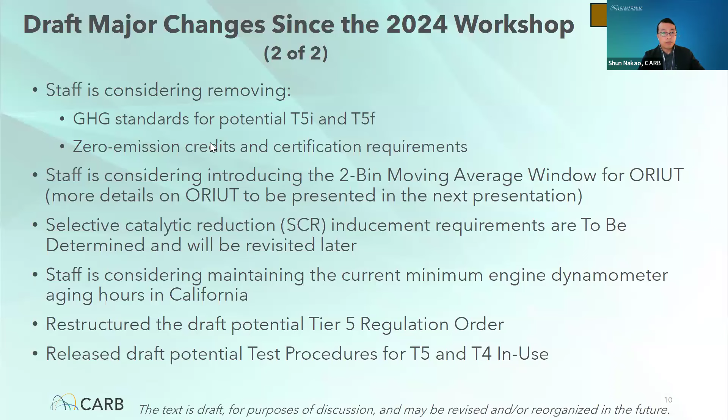Since it is optional, we are considering ways to encourage compliance with Tier 5 interim. One possible approach is to tie incentive funding in the California Clean Construction Program to the Tier 5 interim optional standard. We're also considering using the same approach for Tier 4 final plus DPF to gain short-term PM benefit.

We are requesting feedback on this. Is there any alternative approach for incentivizing optional Tier 5 interim?

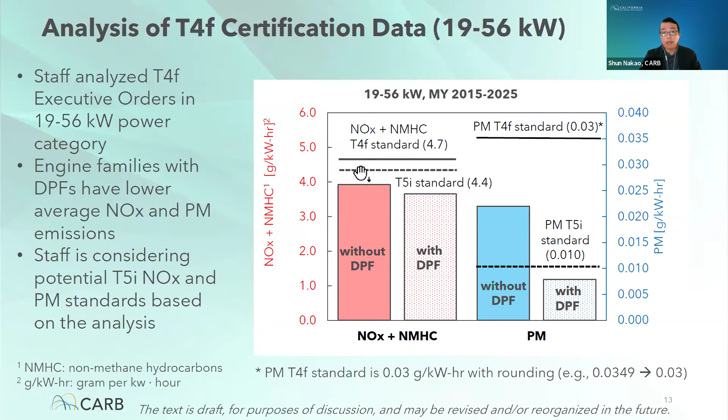As you can see, engine families with DPF have slightly lower NOx plus NMHC emissions, and engine families with DPF have significantly lower PM emissions. Based on this analysis, we are considering the potential Tier 5 interim standards shown in these dashed lines.

This is a similar slide as the previous one, but for the 56 to 560 kilowatt power category. Similarly, engine families with DPF had slightly lower NOx emissions, and engine families with DPF had significantly lower PM emissions. Based on this data, we are considering potential Tier 5 interim standards shown in the dashed lines. We are requesting feedback: is there any concern about the stringency of Tier 5 interim, considering that it is optional?

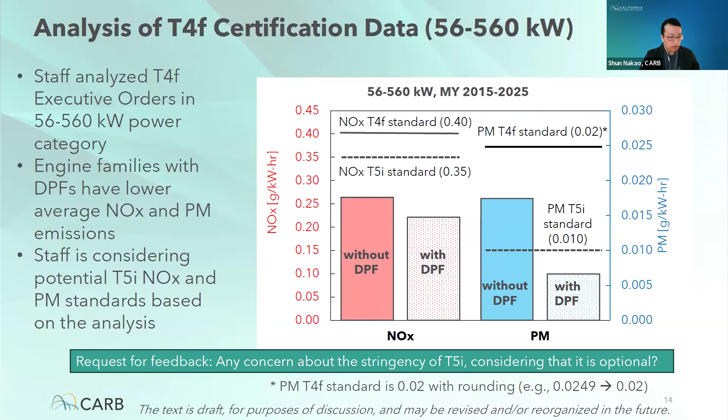The previous slide shows the Tier 5 interim standard, and this chart compares the Tier 4 final standards and potential Tier 5 interim standards and Tier 5 final standards for NOx or NOx plus NMHC, for your reference.

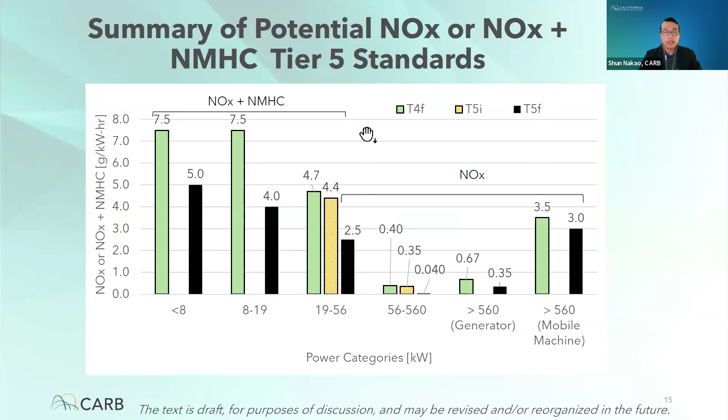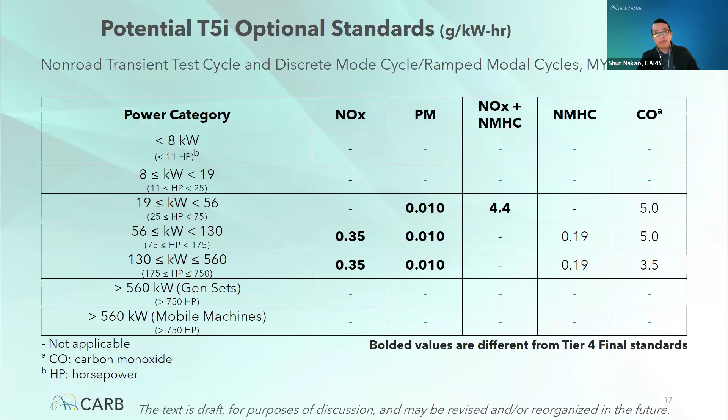This is the same idea, but in a table. This compares the potential Tier 5 interim PM standards for your reference, and also shows the potential Tier 5 final standards for your reference.

These potential standard numbers have not changed since the previous workshop. So the only change for the Tier 5 final standard is the implementation timing.

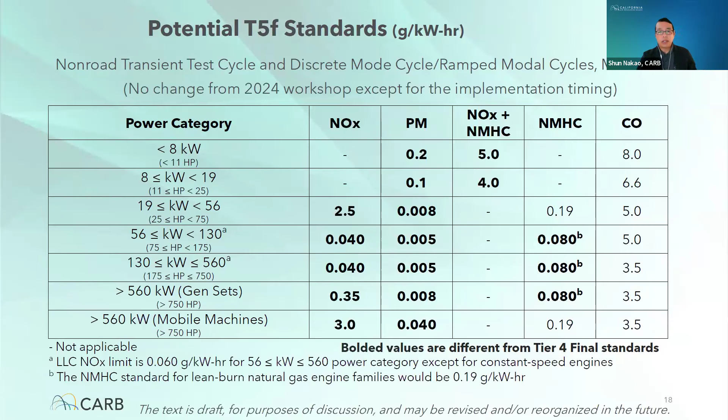These are other potential requirements for optional Tier 5 interim. First of all, Tier 5 interim would not include the new elements in Tier 5 final, such as low load cycle, idle reduction, off-road OBD, off-road in-use testing, and so on.

Tier 5 interim engines would not generate California averaging, banking and trading credits, to avoid earning both federal and California ABT credits. There will be no opportunity to transfer federal ABT credits to California ABT credit banks, because we don't want those credits to be double counted during this interim period.

The use of federal ABT credits would not be allowed for certifying Tier 5 interim engines during the interim period, because Tier 5 interim is optional. Manufacturers certifying Tier 4 final or Tier 5 interim after Model Year 2036 using the 5% limited production allowance must offset the difference between those standards using ABT credits.

Tier 5 interim engines would need to comply with the in-use not-to-exceed (NTE) emission limits and test procedures for the CARB off-road in-use compliance program. Lower thresholds for defect reporting and corrective action apply due to smaller sales volume in California.

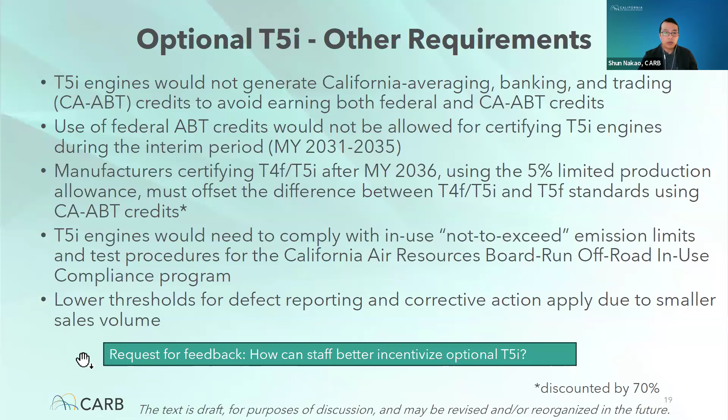From here, I will discuss changes in various major elements. Regarding zero emission credits, we are considering removing zero emission credits. A potential PACE regulation, or phased advanced clean equipment regulation, may pursue zero emission credits with the development of hybrid electric and zero emission technology strategies for manufacturers and/or fleets.

For example, for an 8,000 hour useful life engine, the engine aging is 2,800 hours of engine dynamometer aging, and then extrapolation to full useful life, which is 35% useful life.

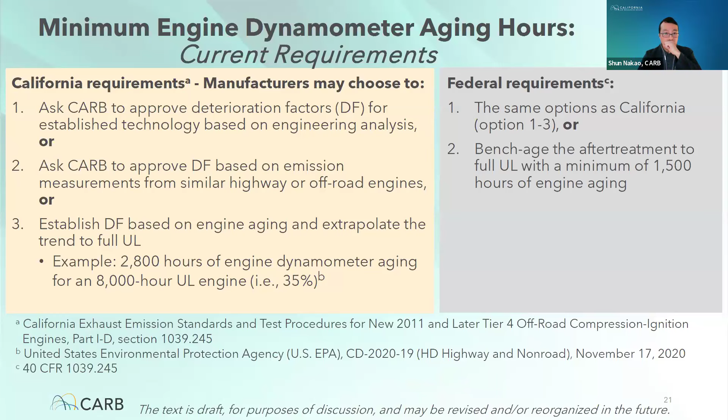In the draft potential Tier 5 final, manufacturers may choose one of two options. The first is the same as the current California requirement, typically 35% of engine aging. The second is similar to the federal requirement, except the minimum hours of engine dynamometer aging are longer: 2,800 hours for an 8,000 hour useful life engine, 1,750 hours for a 5,000 hour useful life engine, and 1,500 hours for a 3,000 hour useful life engine.

The rationale for maintaining the currently employed 35% engine aging is that the potential Tier 5 would not lengthen the useful life hours. We are considering longer useful life year limits, but not changing the useful life hours. Since useful life hours are maintained, we think engine aging hours can be maintained too. We are requesting feedback on whether alignment with the current federal minimum requirement of 1,500 hours is desired. Please share feedback on why shorter engine dynamometer aging might be considered beneficial.

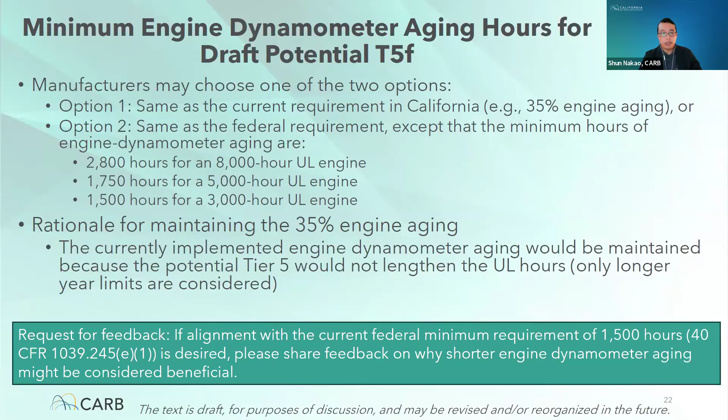Regarding California averaging, banking, and trading, as mentioned earlier, California ABT credit use or generation would not be allowed for Tier 5 interim engines. Engine families meeting Tier 5 final early, in model years 2033 through 2035, may generate California ABT credits with early introduction NOx multipliers.

The California ABT program would begin with model year 2036. There is a one-time transfer of a manufacturer's California portion of existing federal Tier 4 ABT credits through 2035. The transferred federal Tier 4 ABT credits must be discounted by 70% to compensate for the difference between Tier 4 and Tier 5 final requirements, or Tier 5 final elements not in Tier 4, such as low load cycle or off-road OBD.

Regarding the California Transition Program for Equipment Manufacturers, or TPEM, the start of California TPEM would shift to the 2036 calendar year, and there would be no California TPEM for Tier 5 interim, because Tier 5 interim is optional.

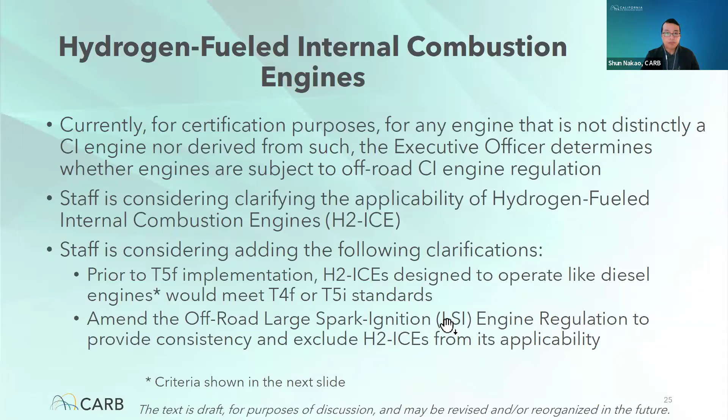This slide is the flowchart for applicable regulation for off-road hydrogen ICE. The first question is, does the engine meet any of the hydrogen ICE criteria shown here? For example, if the engine employs boosted air induction such as a turbocharger, or is designed to operate in equipment previously powered with CI engines, or is derived from CI engines. If it meets any of these criteria, it would certify to Tier 4 final, Tier 5 interim, or Tier 5 final, depending on the model year. If none of the criteria applies, it would meet the off-road LSI engine regulation.

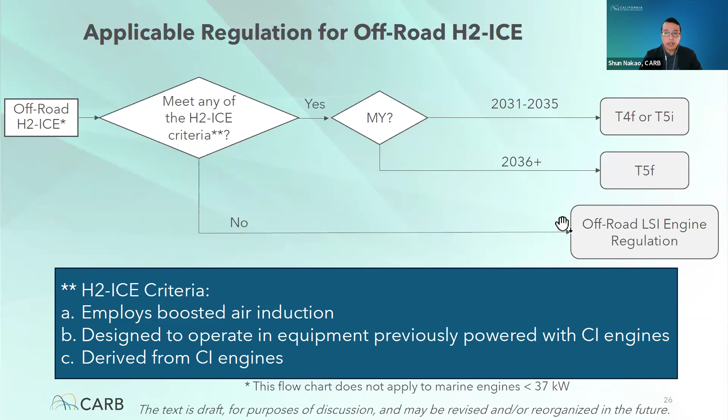This slide illustrates the same idea. As mentioned earlier, we are considering amending the applicability of the off-road LSI engine regulation to exclude hydrogen ICE. Off-road hydrogen ICE meeting any one of the criteria shown in the previous slide would certify to the CI engine standard as applicable, depending on the model year.

So here are potential requirements for hydrogen ICE certifying to Tier 4 final, Tier 5 interim, or Tier 5 final. Hydrogen ICE certifying to Tier 4 final or Tier 5 would meet all the requirements of Tier 4 final or Tier 5 with these following modifications.

The first one is fuel-related sulfur exposure is not required in durability demonstration for hydrogen ICE because hydrogen fuel has extremely low sulfur level.

The second is that we are considering standardizing hydrogen fuel specification for emission testing and service accumulation, aligning with the existing Title 4 CCR section 4181, which requires the high purity hydrogen grade to both internal combustion engines and fuel cell.

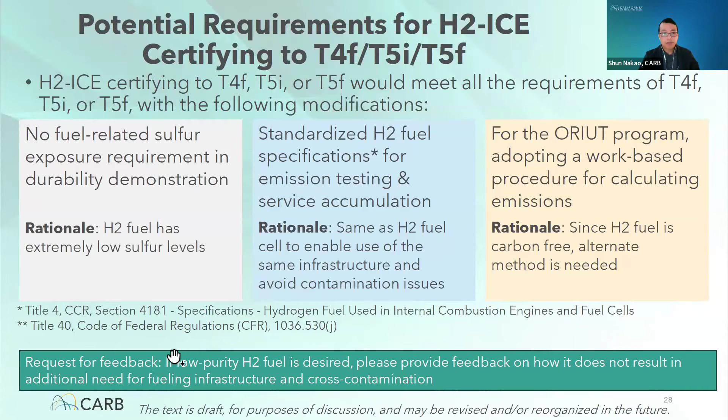Regarding potential requirements for SCR inducement, it is to be determined at this point, and potential strategies include alignment with US EPA's guidance released in August 2025, or alignment with EU Stage 5 SCR inducement schedule, or something else. We are requesting feedback on potential strategies for SCR inducement.

We already discussed useful life warranty defect reporting in the previous workshop, and previously considered lengthened year periods in useful life and warranty for Tier 5 interim as well, but we now consider applying them for Tier 5 final only.

Defect reporting and corrective action thresholds will be based on California production volume for Tier 5 interim and Tier 5 final, to account for low sales volume only in California.

The next element is marine compression ignition engines less than 37 kilowatt. Currently, Tier 2 standards for propulsion marine CI engines below 37 kilowatt remain in effect in California, while marine Tier 3 standards are in effect for federal standards, and we are considering solving this inconsistency.

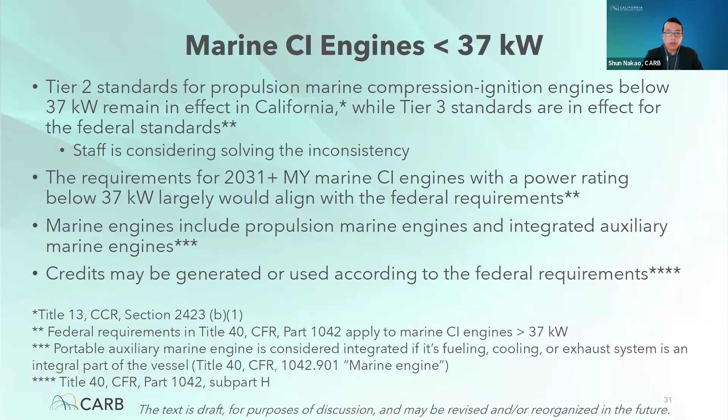Staff is also considering several relief options to provide additional compliance flexibility for non-profit labor union organizations that provide training on the use of off-road in-use diesel equipment. These fleets are currently not exempt, but they can follow the less stringent small fleet requirement regardless of the actual fleet size. Staff is exploring several relief options, including exemption from certain requirements for these entities.

We are requesting feedback on everything, including all sections of the draft regulation order and the draft test procedures. Here we list some of the specific elements we are requesting feedback on.

Regarding Tier 5 interim optional, is there any concern about the stringency of Tier 5 interim, considering that it is optional? We are considering tying Tier 5 interim to incentive funding to incentivize optional standards. What concerns are there? How best can manufacturers be incentivized to bring Tier 5 interim engines to the market?

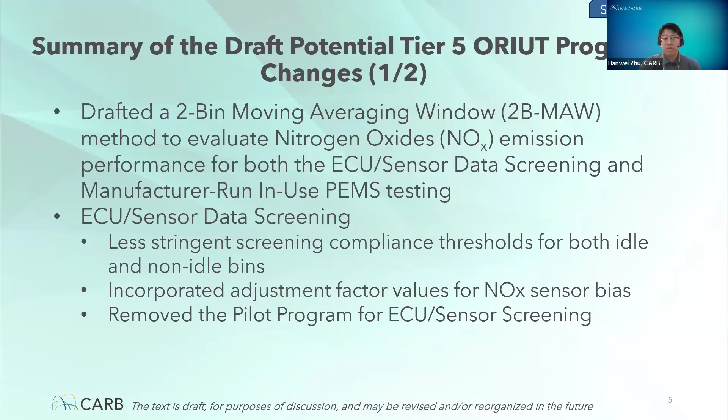For PEMS testing, we're considering reducing the testing burden by limiting PEMS test orders to 25% of the number of large sales volume engine families. We're also considering introducing low ambient temperature correction factors to account for equipment operated in cold environments, and removing the interim margin from the in-use PEMS NOx emission threshold. We're considering relaxing the requirement for small and very small sales volume engine families.

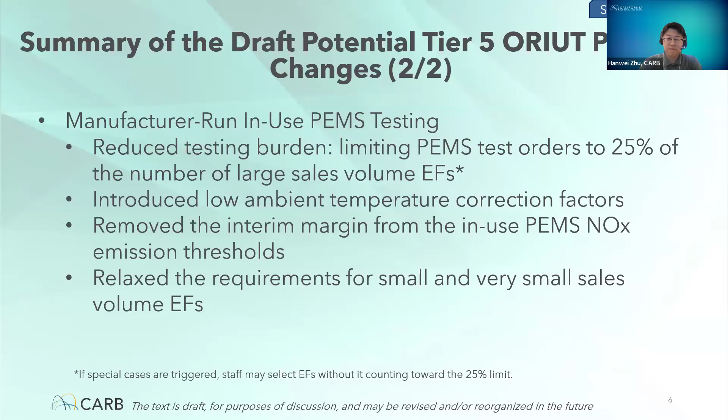The EO will assess the data and check if the NOx and PM criteria are both met for each engine family. If both NOx and PM criteria pass, the engine family will be flagged as a clean engine family and exempted from PEMS testing. Otherwise, it will be flagged as a dirty engine family.

I want to note that a dirty engine family doesn't mean it is high emitting or even emission non-compliant. It just means the engine family will be flagged for potential manufacturer-run in-use PEMS testing, and a compliance determination will be made after the PEMS testing. Also, we haven't made any changes to the PM criteria for ECU sensor data screening, so this presentation will mostly focus on NOx.

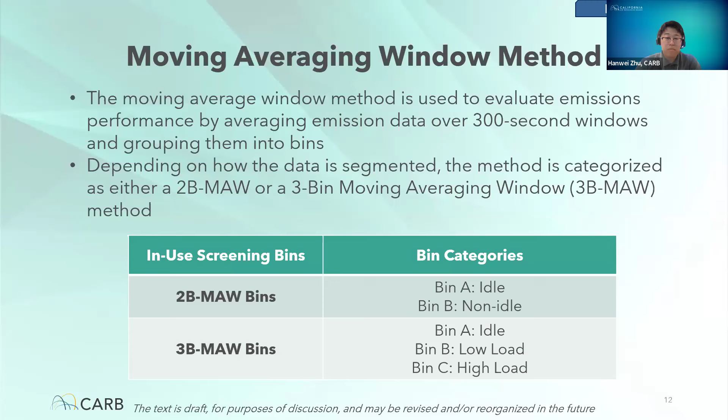In 2023, we introduced a torque-based 3-bin moving average window method to assess in-use NOx emissions using onboard sensors. Stakeholders have provided valuable feedback, including, first of all, the minimum window requirement. Stakeholders are concerned that meeting the minimum window requirement for bin B and bin C will be challenging for some off-road applications, since some of those applications may mostly be operated in either bin B or bin C. Another suggestion by stakeholders is that the 2-bin method could be equally as effective in identifying high-emitting engines compared to the 3-bin method.

Given the feedback we received from stakeholders, we have reevaluated the 2-bin method based on the latest findings from the off-cycle testing contract with Southwest Research. The project demonstrated that the 2-bin method is equally effective at flagging higher emitting engines. It also demonstrated that the 2-bin method increased the likelihood of meeting the minimum window requirement within a single day of testing. So we're considering selecting the 2-bin moving average window method as the NOx emission evaluation method to align with the US EPA.

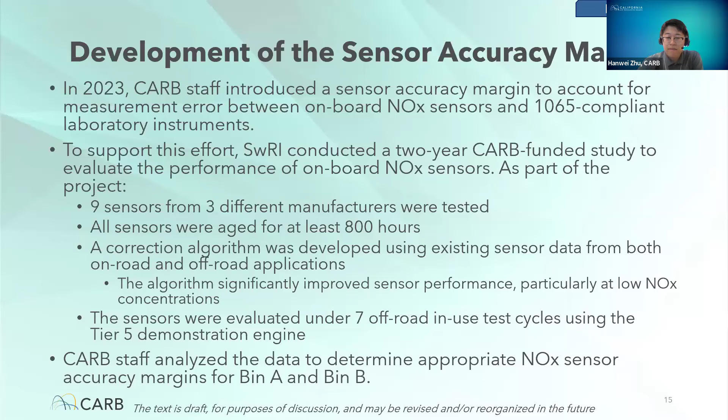So we're considering a sensor accuracy margin for bin A of 0.2 grams per hour, which covers over 85% of this distribution. We're really interested in any feedback from stakeholders on this margin. If there's any suggestion, don't hesitate to share your thoughts and rationale with us, along with some supporting data.

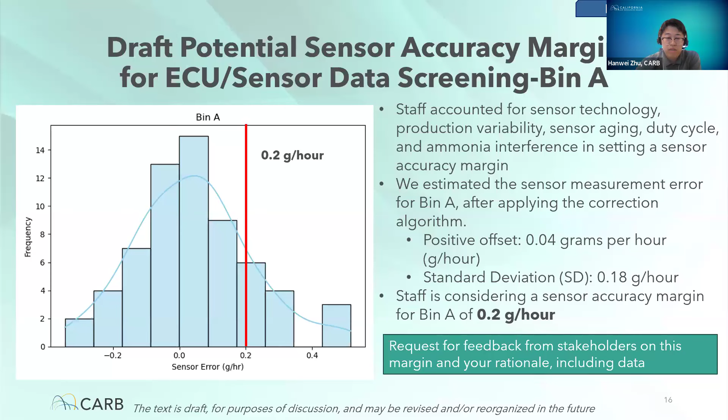We have also estimated the sensor measurement error for bin B, after applying this correction algorithm. The positive offset is around 0.02 gram per kilowatt hour, and the standard deviation is around 0.016 gram per kilowatt hour. We're considering a sensor accuracy margin for bin B of 0.036 gram per kilowatt hour. Again, we're very interested in feedback from stakeholders on this margin. If there's any suggestion, please share with us, including the data.

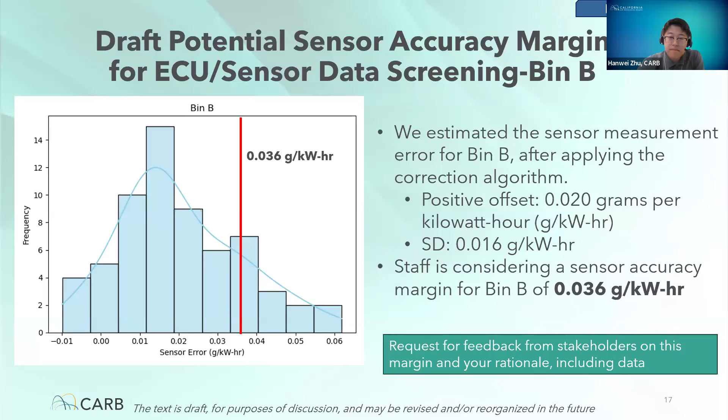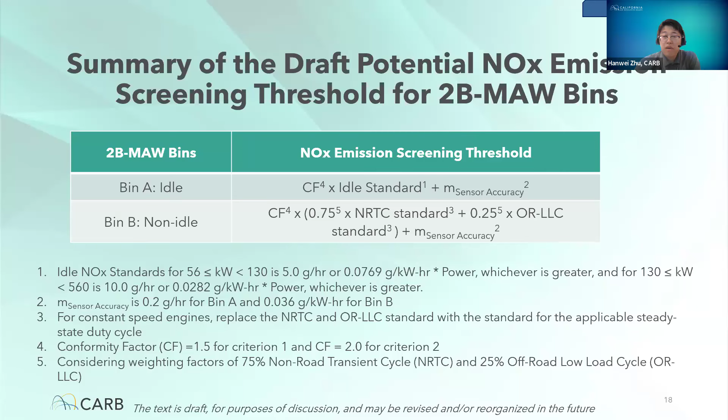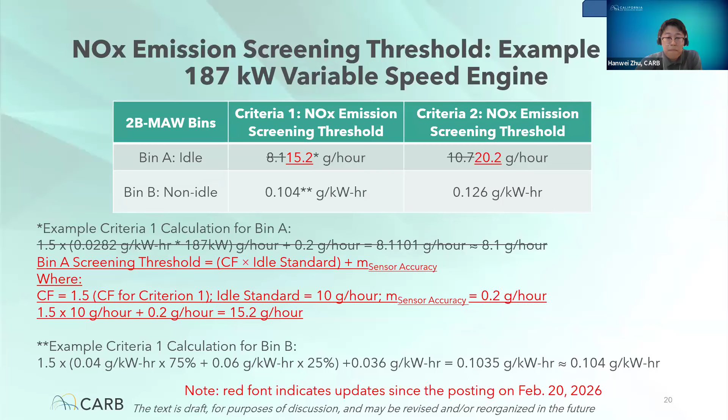Reporting rate means the percentage of engines in the engine family that submitted data, and the pass threshold is greater than 75% of the total CA sales volume. For criteria 1, this means the average NOx emissions for bin B compared to the screening threshold, and the pass threshold in this example is less than 0.104 gram per kilowatt hour. I want to explain criterion 2 very carefully here: it is the combined percentage of unreported and high-emitting engines, and the pass threshold is no greater than 25% of the total CA sales volume.

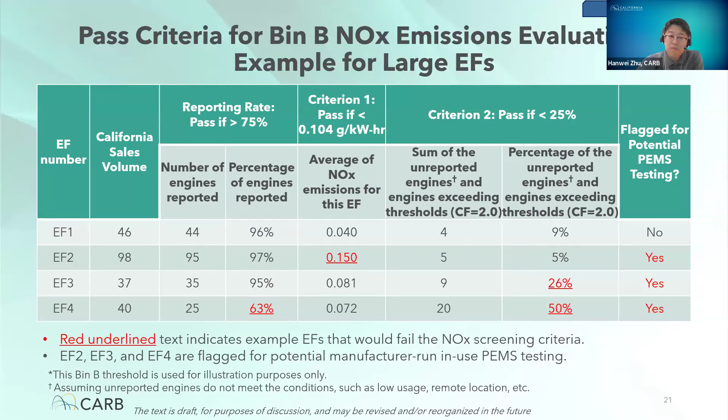The last change I want to mention to sensor screening is the pilot program. We have reevaluated the need for a pilot program because the implementation start date for Tier 5 final will be model year 2036, providing manufacturers with additional time for research and development. Also, there will be no onboard diagnostic requirement for Tier 5 interim engines. As a result, we're considering removing the ECU sensor data screening pilot program.

We'll then talk about the second part of the ORIUT program, which is the in-use PEMS testing.

First, we want to talk about the feedback and potential changes. Stakeholders expressed concern that requiring PEMS testing for 25% of the engine family was too burdensome, and that some off-road programs should not be compared to on-road or on-highway programs.

In response, staff is reducing the burden by limiting PEMS testing to only large volume engine families that have a greater emission impact. The current draft potential test procedure states that the annual test order will not exceed 25% of the annual number of large volume engine families certified over the past 4 years.

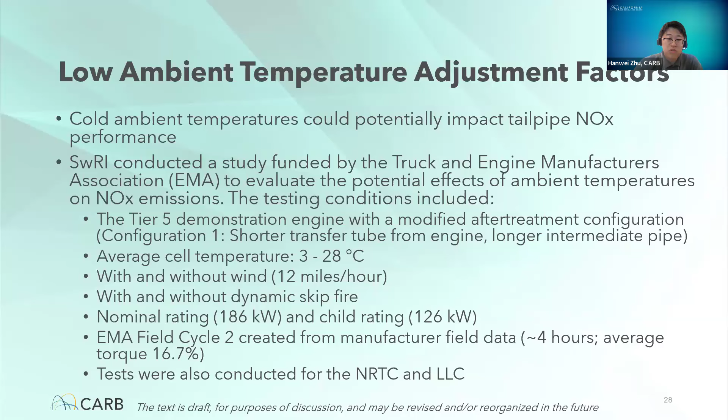The results show that low ambient temperature can increase NOx emissions under certain configurations and cycles. The worst case temperature effect on the EMA field cycle 2 was observed for the child rating engines, and NOx emissions in bin A increased from 0.12 gram per hour at 27 degrees C to 2.2 gram per hour at 3 degrees C. Similarly, bin B emissions rose from 0.03 gram per kilowatt hour to 0.079 gram per kilowatt hour.

The off-road low-load cycle was also tested in this study, but we think that although the low-load cycle had higher emissions than field cycle 2, the field cycle result would be more relevant and representative, because low ambient temperatures are only encountered during field cycle testing.

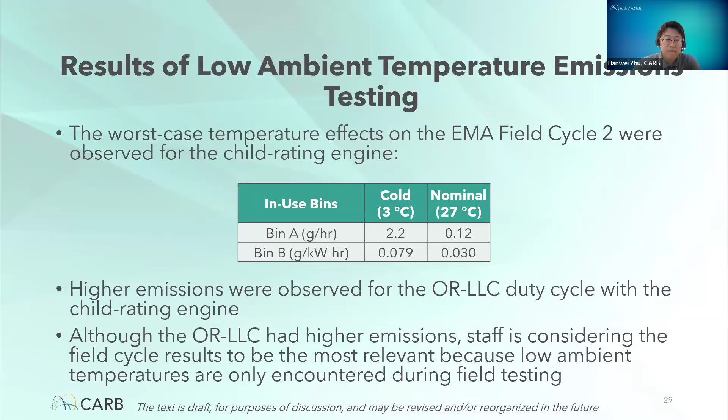Based on those testing results, we developed a correction factor for PEMS NOx threshold when the temperature falls below 20 degrees C. For bin A, the equation to calculate the correction factor is 20 minus the ambient temperature in degrees C, times 0.122 gram per hour. For bin B, the slope becomes 0.00288 gram per kilowatt hour. Those slopes were developed based on linear fitting of the data from 3 degrees C and 27 degrees C, and we believe these correction factors will help account for the possible increase in emissions under cold conditions.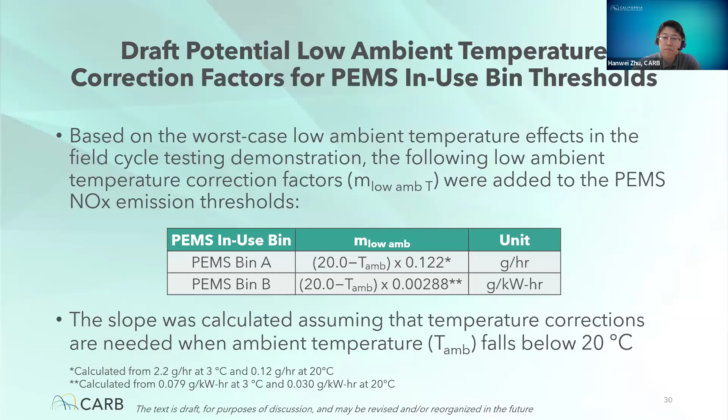Moving on to other feedback for in-use PEMS testing, another question raised by a stakeholder is whether failing a PEMS testing will automatically trigger recall. The answer is yes. If an engine family fails the sum over sum emission threshold, the manufacturer will take corrective action under CCR section 2113 and 2125. The corrective action may include recalibrating the engines, replacing defective parts, or taking other measures to reduce the emissions.

Another change staff is considering is removing the interim allowance for PEMS testing. The interim allowance was originally set to account for emission measurement technology advancement during the interim period. Because Tier 5 interim for model year 2031 to model year 2035 is optional, and our draft timeline for Tier 5 final implementation starts with model year 2036, we believe this will provide manufacturers sufficient time to continue technology development and prepare for emission compliance. Therefore, we're considering removing that interim allowance.

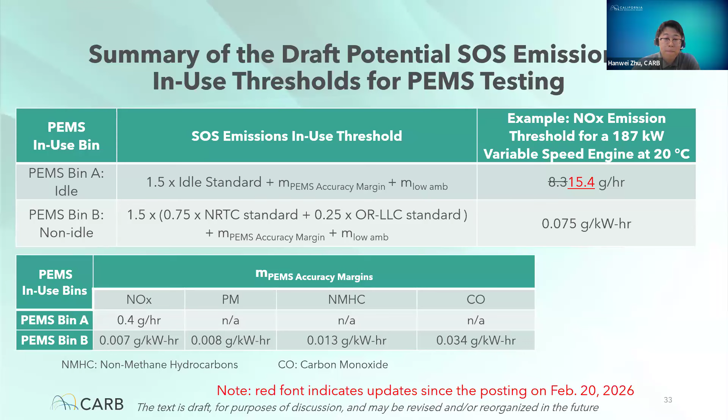Lastly, we invite stakeholders to provide feedback on all aspects of the draft proposal. Specifically for ECU sensor data screening, we're seeking feedback on NOx sensor accuracy margin, reporting flexibility, and removal of the pilot program. For PEMS testing, we're seeking feedback on removing the interim allowance, the 25% cap on large volume engine families, the criteria for selecting test articles, and the development of the low ambient adjustment factor.

Our email address for comments is tier5@arb.ca.gov. We think stakeholders' input is critical to finalize these test procedures and ensure all of those are effective. Thank you so much for your attention, and I'll take questions.

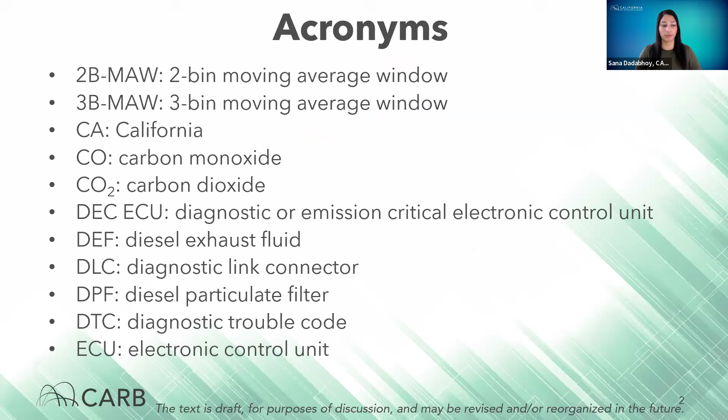Today we will be talking about updates to the OR-OBD proposal. The draft OR-OBD regulation provided on the Tier 5 workshop website includes the details of the proposal. This draft regulation contains some revisions from the proposals we presented at the workshops in October 2023 and October 2024, and in this presentation we will be covering the major revisions.

In the original proposal, the applicability included electronically controlled off-road diesel engines certified to Tier 5 standards. In the revised proposal, the applicability would include off-road engines that are certified to the Tier 5 final standard, are equipped with an ECU that controls fueling, and are equipped with an ECU that controls intake airflow, EGR flow, turbocharger boost level, DEF injection quantity, regeneration events, after-treatment thermal management strategies, or catalyst operating conditions.

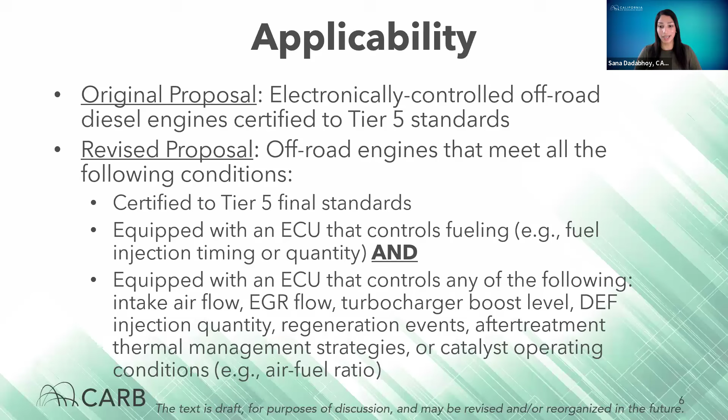This slide is just a quick refresher of OBMD versus OBD. Tier 5 final engines that are equipped with SCR systems or a tailpipe NOx sensor will be required to meet the OBMD requirements, while all other engines will be required to meet OBD requirements.

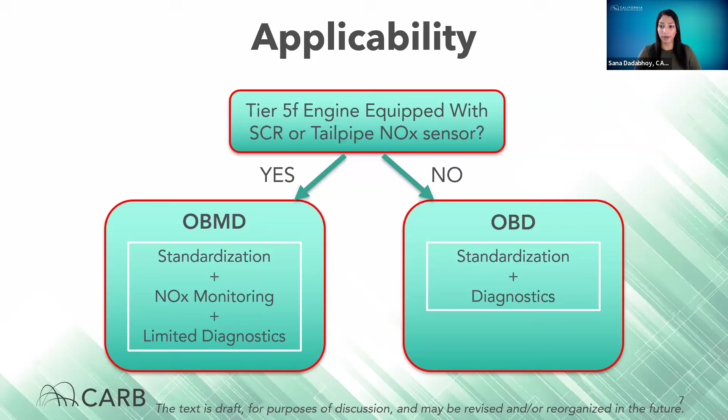The revised proposal eliminates the Phase 1 and Phase 2 terminology while retaining the two stages of implementation. We included this table as a reminder of the requirements of each stage. Stage 1 includes limited standardization requirements, no diagnostic requirements, demonstration testing only for NOx mass accuracy, and no post-certification requirements. Stage 2 includes all of the Stage 1 requirements plus additional standardization requirements, OBD and OBMD diagnostic requirements, diagnostic demonstration testing, and post-certification verification requirements.

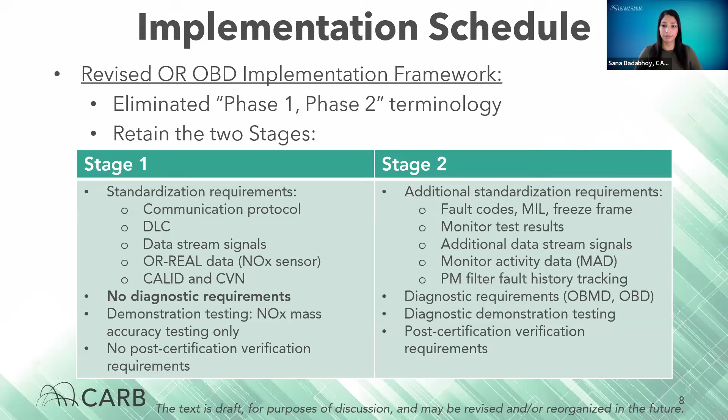Staff is also proposing to revise the schedule to align with the final Tier 5 implementation schedule by removing the parent-child rating distinctions and moving all power categories to the same schedule.

Moving on to standardization requirements. The October 2023 proposal allowed the use of both SAE J1939 and J1979-2 communication protocols, but J1979-2 was removed from the October 2024 proposal. However, due to industry demand, the current proposal is once again allowing the use of both protocols.

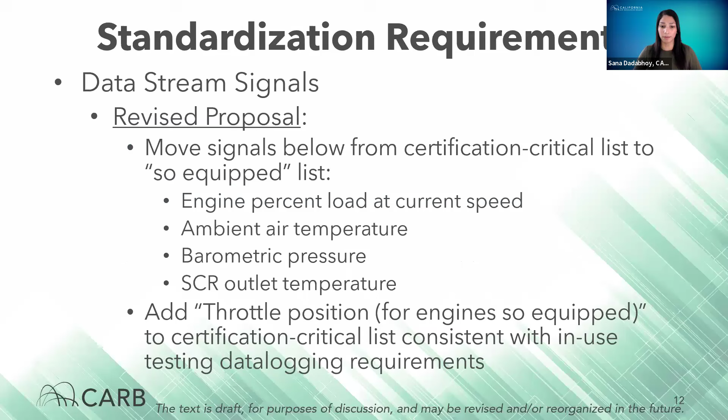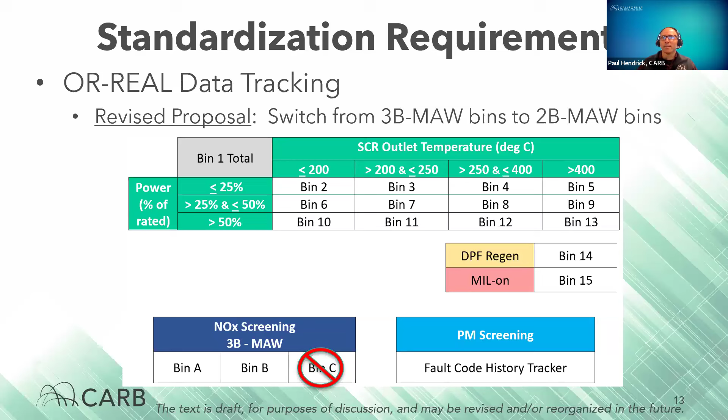But to be consistent with the updates that Hanwei went over in that proposal, we are eliminating bin C. You can see at the bottom, the NOx screening 3B-MAW box. So we're getting rid of bin C to be consistent. On the next slide, that's shown in more detail, exactly what that means.

This table shows the different arrays and the different parameters involved in off-road real tracking. Anywhere you see a bin C, it's being crossed out, so we're keeping bins A and B where they are. If you look at the right-hand column, the lifetime engine activity array, you'll notice we've removed all of the moving average window bins A through C. That simplifies the implementation in the ECU.

It reduces memory usage, and we think it was a good compromise. In the last row, you'll notice that bins A and B were added to the total fuel consumption parameter, and that's consistent with a previous suggestion from industry. Next slide please.

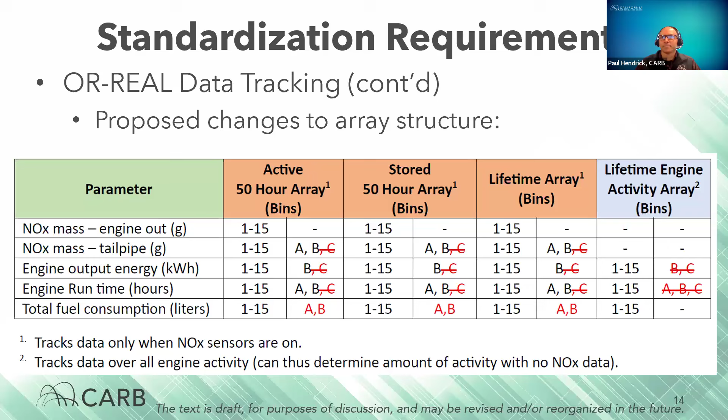Another piece to the proposal relates to how these 300-second windows of data get sorted into the different moving average window bins. Our original proposal used the average power approach, where power was calculated using the torque and speed signals from the engine ECU, and then depending on what you get for a given window, you dump the data into the appropriate bin.

What we're suggesting to change here is to move towards using a parameter called normalized CO2 emission mass instead of average power. That change is going to harmonize with the official method that US EPA uses, so that's a good thing.

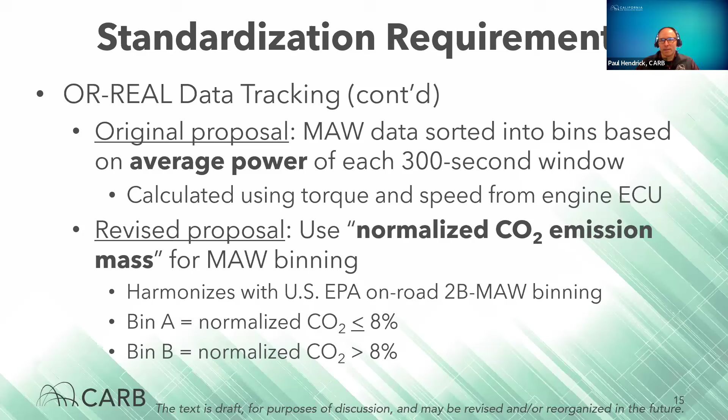So what that looks like for bins A and B is that bin A will be defined for windows that have a normalized CO2 value less than or equal to 8%, and bin B will be for normalized CO2 greater than 8%, so basically everything else. Next slide please.

This equation shows what this term really is. The normalized CO2 emission mass is basically just the total CO2 mass over that 300-second window divided by those three terms that you see in the denominator, and that's the standard equation used in CFR.

The only little wrinkle here relates to this ECO2 term. What we're using for that is the CO2 emission rate from certification test data, specifically from the emission data engine over the NRTC. That's how it's being defined for this usage.

If the engine is a constant speed engine, then it would be the same value from the steady state cycle. Pmax is just the highest rated power for that engine family, and T window is just our familiar 300-second interval. Next slide please.

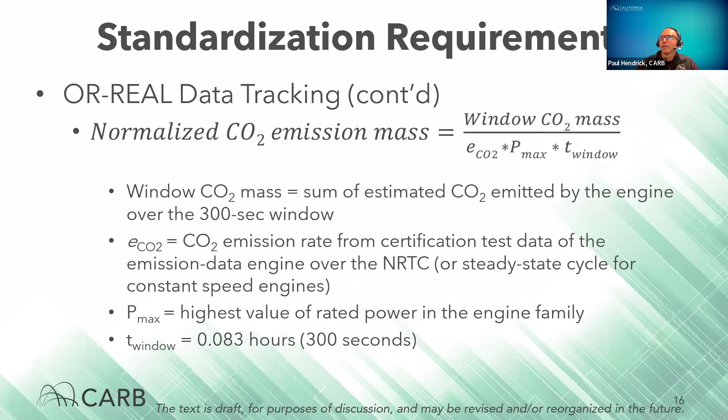For that proposed method to work, of course we need to estimate what the CO2 mass is over that 300-second period. We are not expecting these engines to come with CO2 sensors, so we need to have another way to estimate that value.

What we're proposing here is that we leverage the O2 signal that is coming from the NOx sensors and use that. If you look in that second equation, that's where that percent O2 fits in. The basic idea is that we're approximating all of the oxygen that's being consumed by the engine to be partitioned into CO2 and H2O, which is largely correct. Using that, basically just simple stoichiometry, you can estimate the percent CO2 as shown there.

The 1.8 value, the conspicuous little 1.8 value in the denominator, comes from CFR. For number 2 diesel fuel, sort of standard number 2 diesel fuel, they use a ratio of 1 carbon atom for every 1.8 hydrogen atoms. So that's the background on that one.

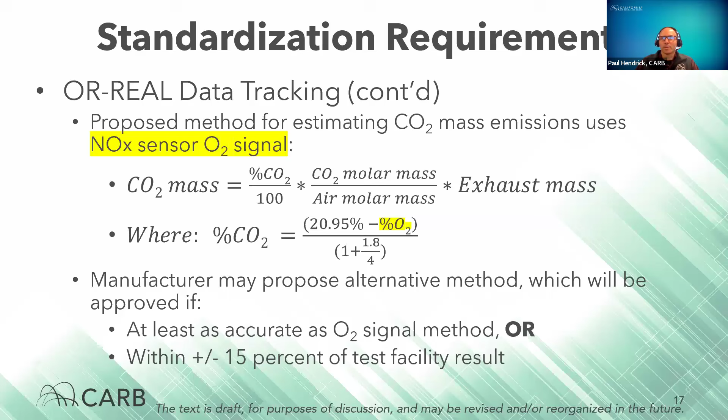Related to these OR real requirements is the NOx mass accuracy requirement. In our original proposal, this was a to-be-determined parameter. We would require that the OBD system engine-out and tailpipe NOx mass estimates satisfy a particular level of accuracy relative to lab results, specifically over the certification test cycle. This is really a certification requirement, not an in-use requirement. So just at the time of certification, we need to check that the ECUs are doing a good job of calculating the NOx mass.

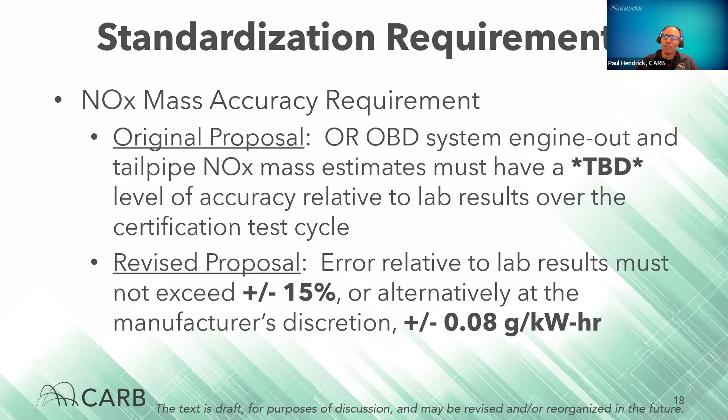What we're proposing now is to fill in the blanks, to say that the error relative to lab results must not exceed plus or minus 15%, or plus or minus 0.08 grams per kilowatt hour. This 'or' means whichever is easier. In practical terms, the most important one is the plus or minus 0.08 grams per kilowatt hour, which would apply to the tailpipe accuracy test. We expect that the 15% would be more relevant to the engine-out NOx mass side of things.

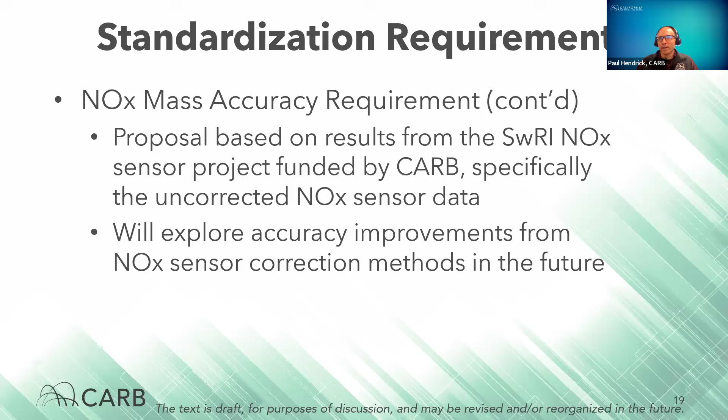This proposal is based on test results that Hanwei introduced in his presentation from the Southwest NOx Sensor project that we funded. What I'm going to show you is the uncorrected NOx sensor data. As Hanwei mentioned, we are encouraged by the results of some relatively simple correction methodologies that Southwest has developed, but we'll look into that more in the future.

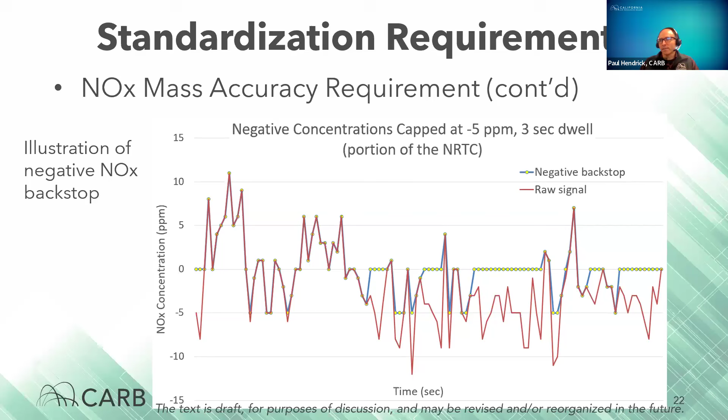Next slide, please. Okay, so this graph is showing the impact of this approach on the NOx error. It's comparing 3 different scenarios, and we're only looking at one hot NRTC for this example. We have the scenario where you have no negatives allowed, which is the original proposal. Then in red in the middle, you have where all negatives are allowed as is. And finally, the negative backstop in green.

So for those sensors that developed a positive offset, there's no difference - all of these strategies give you the same number. But if you look on the right, we have the sensors that had more substantial negative values, and the negative backstop approach does improve, or reduces the NOx error quite noticeably, about 50% or so. So that's good, that's a good thing to see.

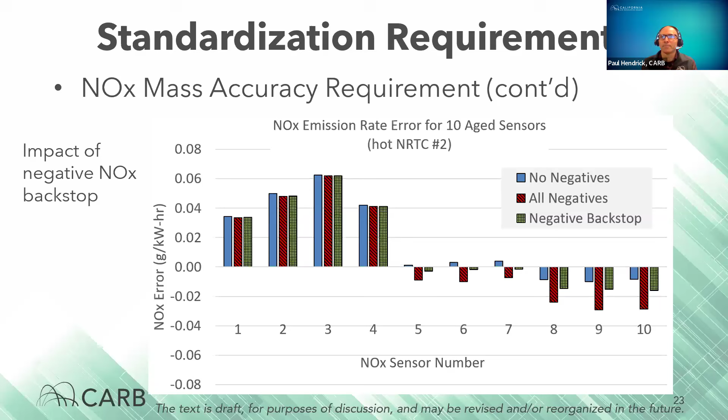Next slide, please. Okay, so now we're shifting gears to another topic that has to do with monitor activity data. This is largely unchanged from the original proposal. This is just the tracking of how often each diagnostic runs. So you have a mini numerator counter that increments every time a monitor makes a decision, and you have a mini denominator that increments every time the general denominator increments, which is kind of a measure of the number of trips or operating cycles that have elapsed.

The only thing we want to do is provide some more detail on when to pause this tracking. What we'd like to see is that if you have a particular type of fault code pop up that pauses the general denominator, then we'd want all tracking in all of the ECUs doing this tracking to pause. That's because all of the mini denominators are looking to this general denominator to determine when they need to increment. So if the general denominator is paused, then all of the mini denominators will also be paused. It would be unfortunate if the mini numerators continued to increment in some DEC ECUs and not others. This makes sense to just pause everything across the board.

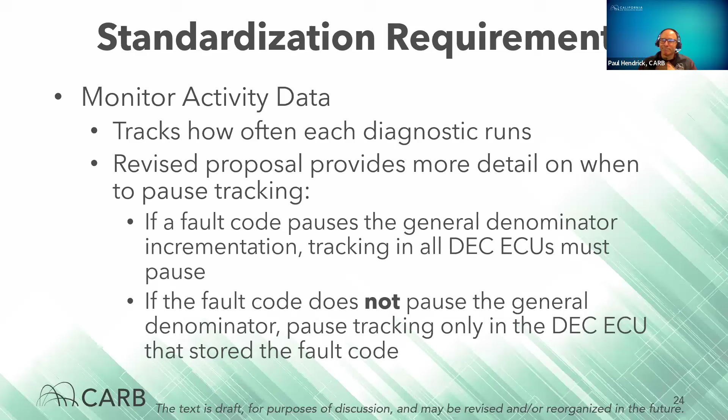But in the more general case where a fault code does not pause the general denominator, then we have our default situation where you would only pause the tracking in that ECU that stored the fault code. Okay, it's kind of in the weeds, but we're just going over it. Okay, next slide, please.

And then another piece of this relates to which ECUs would be required to support a mini denominator. In the original proposal, we said that if the ECU is capable of storing a fault code, then it should also track and report a mini denominator. In the revised proposal, we're adding a criterion to that. So in addition to storing a fault code, the DEC ECU would also need to track and report mini numerator data. It wouldn't make sense to have a DEC ECU that tracks the mini denominator but not a mini numerator, because ultimately you're taking a ratio of these values to determine the frequency that the monitor is running at.

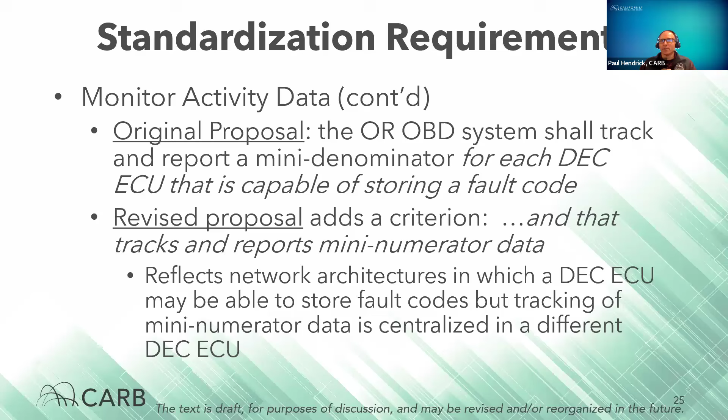And really what this is reflecting are those network architectures where you could have DEC ECUs that are capable of storing fault codes, but not necessarily tracking mini numerator data, because the manufacturer centralized that task in a different ECU. So it's just kind of a clarification here too. Next slide, please.

Okay, so now we're really shifting gears, moving into diagnostic requirements, leaving standardization stuff behind. We're going to start talking about the OBM NOx emission threshold monitor. That's really the flagship monitor of the whole program.

Originally, what we proposed is that the NOx monitor would make pass-fail decisions based on data stored in the OR-real moving average window bins. Originally it was bin B and bin C that this monitor would look into and collect 2,400 windows of data from those bins and use that data to judge if there are high NOx emissions or not.

The problem with this approach is that there would be no monitoring taking place when the moving average window bins are paused due to the presence of a malfunction. Those bins would pause for any fault code.

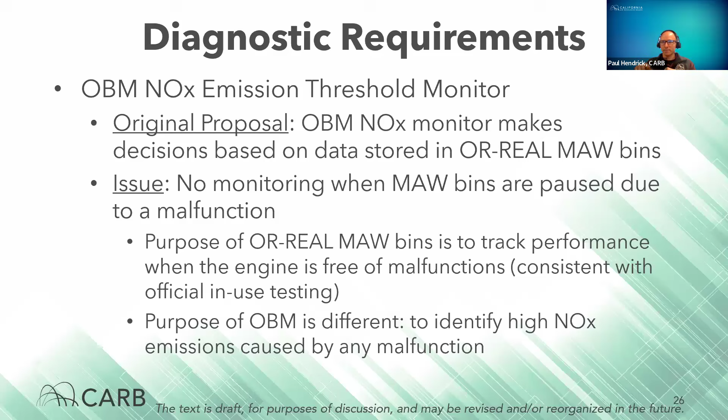So I have a table. If we go to the next slide. Oh, or maybe it's the slide after that. But I'll get to the table in a second.

So the basic proposal, because of that problem, is to have the NOx monitor use data that are independent of these OR-real bins. In essence, what that's going to mean is you will have different pause conditions. The real bins will pause under one set of circumstances, and then the NOx monitor will have its own independent conditions. The next slide will give an example of that.

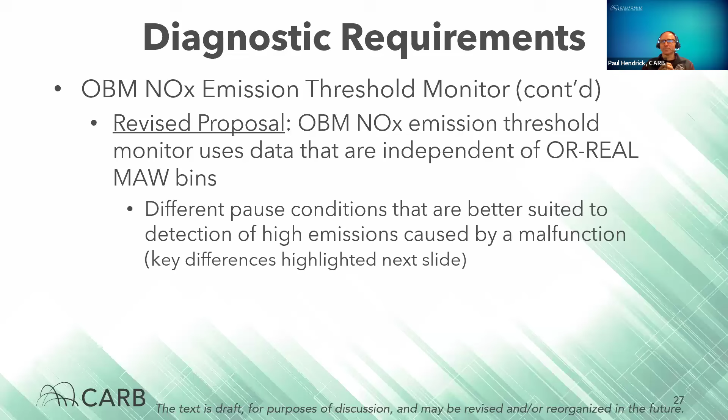So in this table, we have a comparison of how the real bins will behave relative to the NOx monitor under a few conditions here.

As I mentioned before, if you have a fault present and the MIL is on, just the general MIL, then you would have paused real bins, but we would want the NOx monitor to remain active, and that's for the vast majority of fault codes, which include if the engine out NOx sensor has a fault code or the SCR outlet temperature has a fault code. It doesn't matter - we would want the NOx monitor to continue to be checking for high emissions.

But now more specifically, if the MIL is on for a tailpipe NOx sensor malfunction, then everything's paused. And of course, that's because the NOx monitor is totally dependent on that tailpipe NOx sensor to make its decisions.

So there is that alignment, but one notable difference is that in the case of the NOx monitor, we would reset all of the windows that were collected since the last monitoring decision, which can be a lot, right? We're talking about as much as 2,400 windows of data, as opposed to just resetting the current 300-second window, as would be the case for the REAL bins.

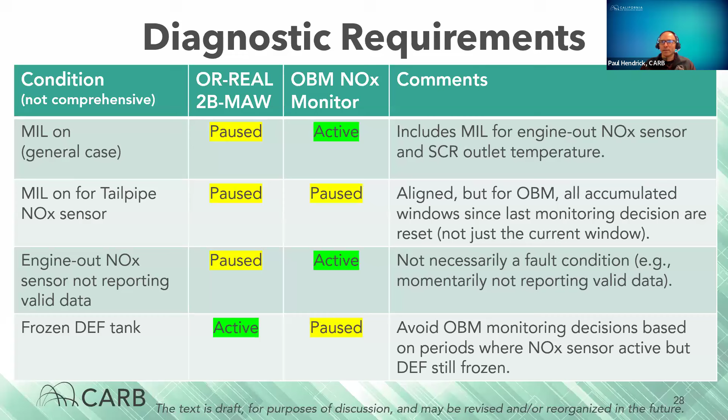But on the surface, the frozen DEF tank is not a pause condition. However, for the NOx monitor, we would like to see that paused because it's a noise factor in determining whether there's an actual malfunction that's producing high NOx. So this is where we kind of flip, if you will, the active and paused states. Next slide, please.

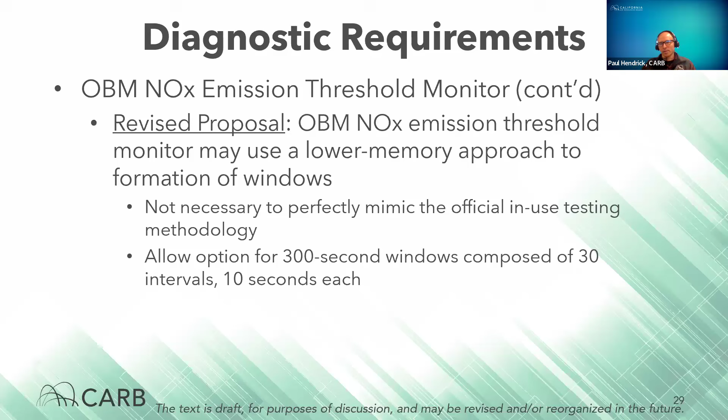This is the last piece of the NOx monitor changes. We don't see any need for the NOx monitor to perfectly mimic the official in-use testing methodology, so we'd like to offer a lower memory approach to manufacturers to form these 300-second windows. The idea is to allow an option of having 30 intervals comprised of 10 seconds each, instead of 300 one-second intervals. Thanks for the industry suggestion on this, it makes sense.

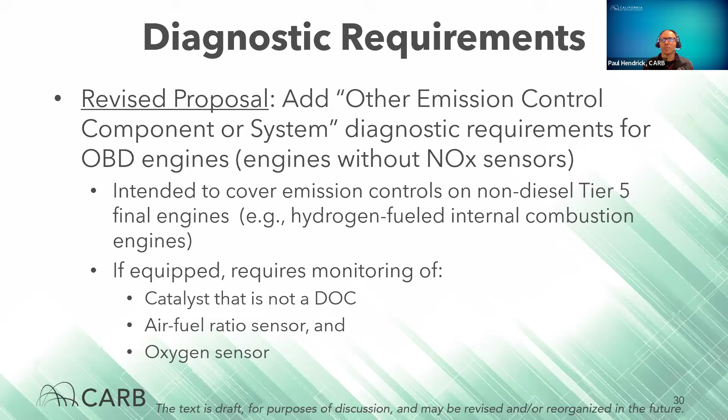But to make sure we cover our bases, considering other types of non-diesel technology could pop up which could potentially meet those tighter standards in other power categories without using SCR and a NOx sensor, we would like to expand that table and propose some more appropriate, technically feasible OBD thresholds, shown on the next slide.

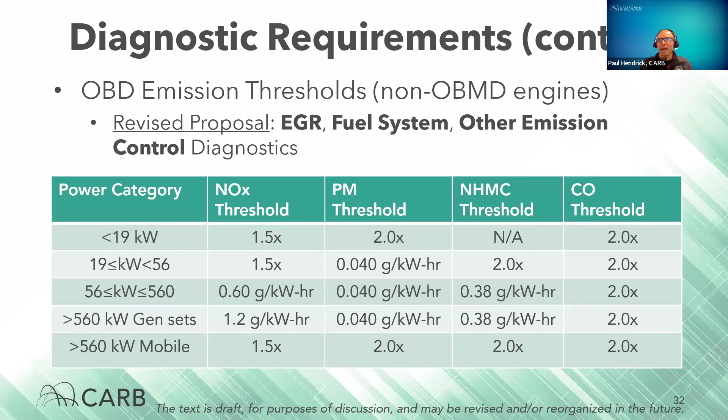Now we're going to move on to the changes in demonstration testing. Staff is proposing changes to the requirements related to tailpipe NOx mass accuracy testing, specifically the test engine selection criteria. The original proposal required that manufacturers conduct this testing on 1 to 3 engines per year, depending on the number of engine families the manufacturer certifies for that model year.

The revised proposal would require manufacturers to test each engine with a tailpipe NOx sensor that the manufacturer submits an OR-OBD system application for. For OR-OBD certification documentation groups, that would be the representative engine. This will help determine if there are any issues with the engine's ability to accurately calculate NOx mass on a good portion of the engines, so we can ensure they are producing accurate OR real data in use.

There are also changes to the test engine system aging requirement. The original proposal required that for stage 2 OBD engines, the manufacturer would use a low-hour engine stabilized using the procedure they employ for emission certification, paired with a full useful life tailpipe NOx sensor, while all other engines would use a certification emission durability test engine system aged in accordance with a tailpipe certification aging requirement.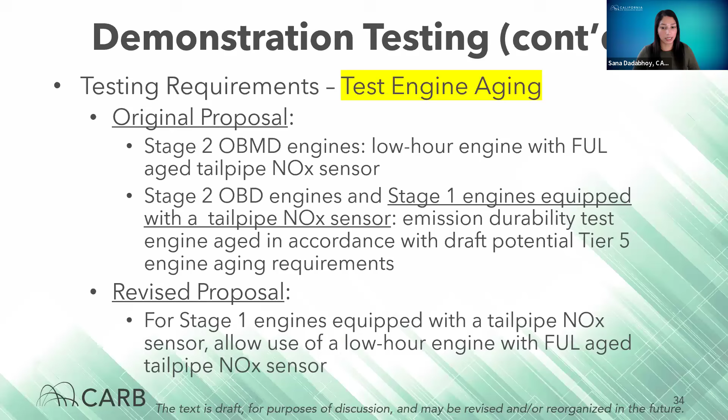The original proposal did not include a definition for a full useful life age NOx sensor, so in the revised proposal, it is defined as a NOx sensor that has been aged together with an engine in accordance with the Tier 5 certification aging requirements.

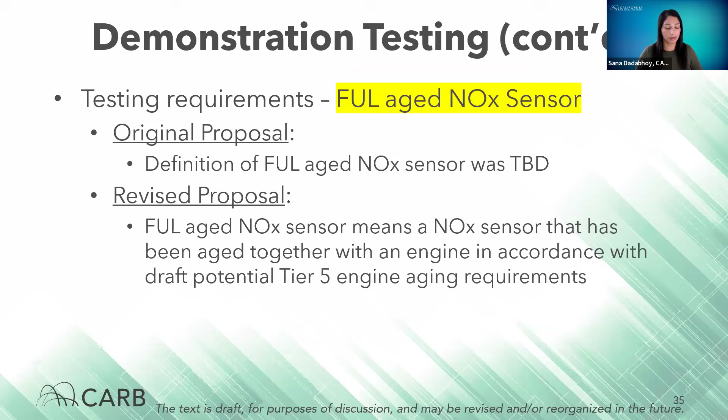For certification documentation, the original proposal required the representative engine to cover all emission control devices, monitors and diagnostics for all engines in the certification documentation group, and that the representative engine is certified to the most stringent emission standard in the group. In the revised proposal, the representative engine is required to be chosen from the engine family with the highest projected California sales number in the group, and from the engine rating with the highest projected California sales number in that engine family.

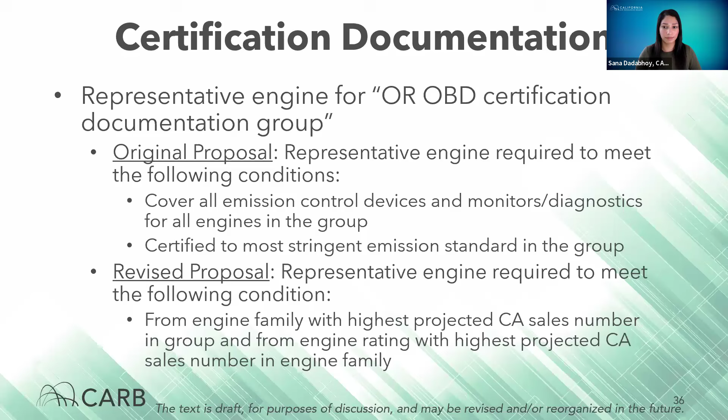Another change related to certification documentation requirements is the Diagnostic Link Connector, or DLC, information. The original proposal required manufacturers to provide DLC description and location information in their OR/OBD applications for every equipment covered. However, engine manufacturers indicated they are unable to provide this information at the time of application submission, since equipment manufacturers are the ones who install the DLCs. Therefore, staff is proposing to change the timing of submitting this DLC information to post-OR/OBD certification, specifically no later than 12 months after the start of engine production.

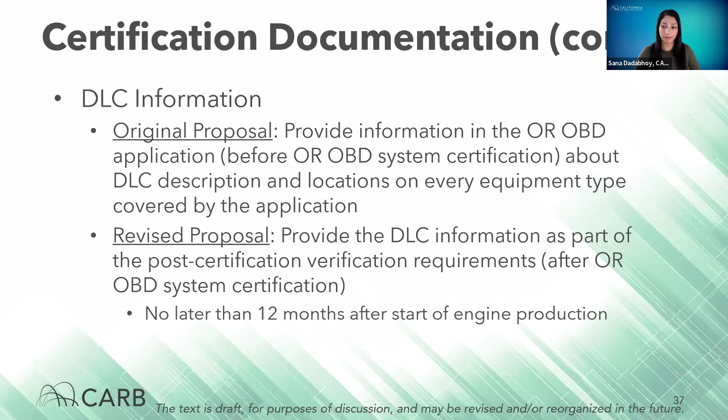Some changes were made to the model years in which deficiency fines apply. The original proposal split the implementation of fines by power category and parent-child ratings. With the removal of the parent-child rating distinctions in the revised proposal, staff is proposing that fines apply to all power categories for model year 2039 and up, for stage 2 engines only.

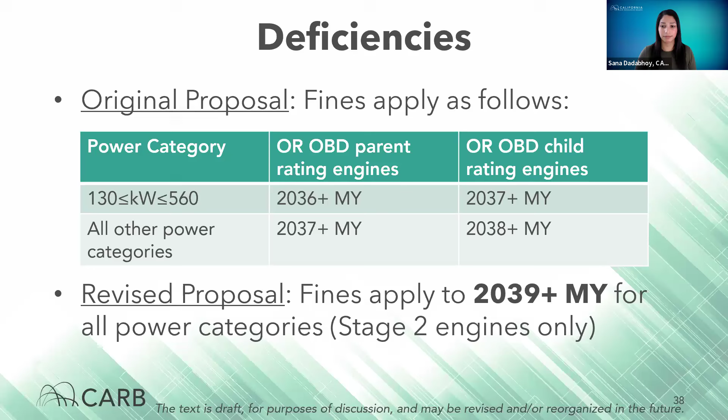The number of deficiencies after which fines apply has also been changed. Originally, deficiency fines would apply to the third and subsequent identified deficiencies, but in the revised proposal, fines would apply to the fifth and subsequent deficiencies for model years 2039 through 2042, and to the third and subsequent deficiencies for model year 2043 and onward.

Here's the contact information for the manager of the OBD program development section, Jason Wong, and the OBD branch chief, Mike Regenfuss. Thank you for your time today, and we will now be moving on to questions.

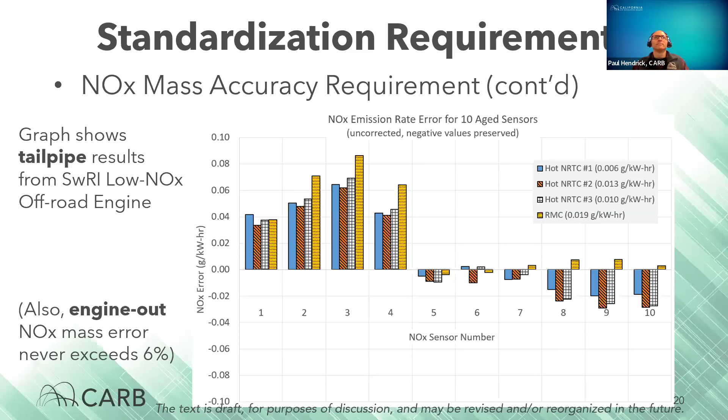Thank you, Paul, and thank you for the question. Our next question is from Rob Ways: will PVE standardization testing, J1939-84 or J1699-5, be required? Jason will take this question.

Yes, thank you, Martha. In answer to that, J1939-84 and J1699-5 would not be appropriate for this, because the software has been developed for this particular requirement, which is different from on-road. So for the initial years, a manufacturer would have to conduct this testing with their own device to check for, in this case, Section I-1, the verification of standardized requirements. You would have to request approval before testing your device, and once it's approved, you could begin testing. We need to finalize this requirement so that industry can help develop that software to do the testing, similar to what we have for on-road.